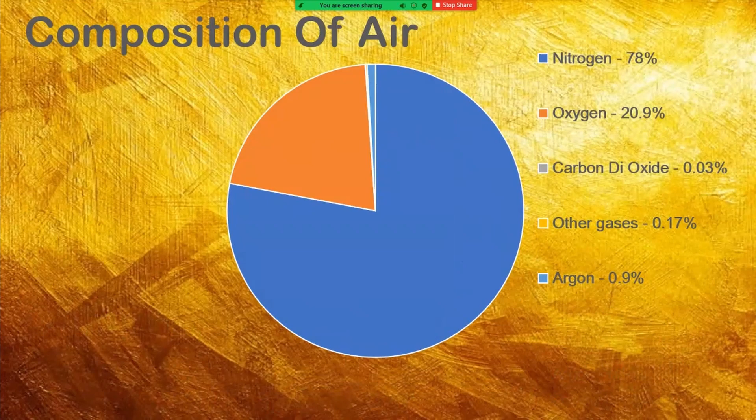So why are we bothering about it? To understand it, let's move on to our next slide.

Now, here we are going to see the fossil carbon dioxide emissions. If we observe the data in the year 2000, we can clearly see the carbon dioxide emission was below 25 billion tons. Moving further to 2002, we can see the graph rising. Between the years 2008 to 2017, we can see clearly an increment of 1.5% per year. And further in 2018, we could see the jump from 1.8 to 3.7, and further to 2.7%.

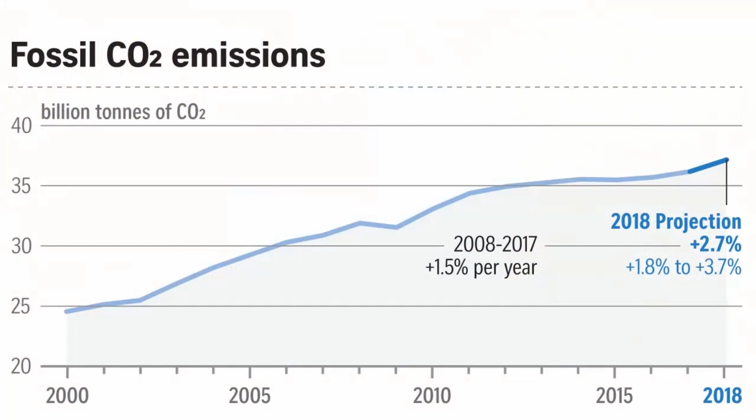Now, in the next slide, we are going to see the state-wise carbon dioxide emissions in India. Here we can see that Gujarat is holding the first position with a total of 90 million tons emission of carbon dioxide, having a total share of 18% in overall emission. And if we consider the state with least carbon dioxide emission, it is Uttarakhand, with 10 million tons, holding a share of 2% in overall emission.

This is the reason why we are so much concerned about the 0.03% of carbon dioxide in air, which is nothing except a slow poison to us. So to reduce this factor, we are about to learn a simple thing which can change the entire scenario, and that thing is electric vehicle.

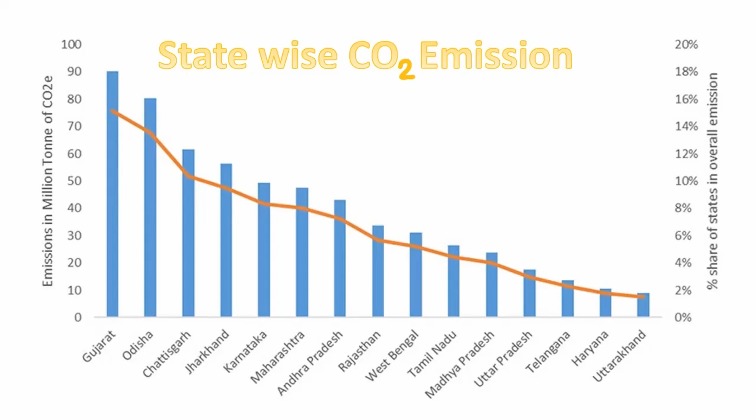So what is an electric vehicle? As Bodhisattva said, electric vehicles can reduce the use of carbon dioxide, so we need to know about electric vehicle. An electric vehicle is one that operates on an electric motor. Here the electric energy is converted into mechanical energy. It is easy to charge and fast to go. It takes energy from renewable sources and is highly efficient with less fuel consumption.

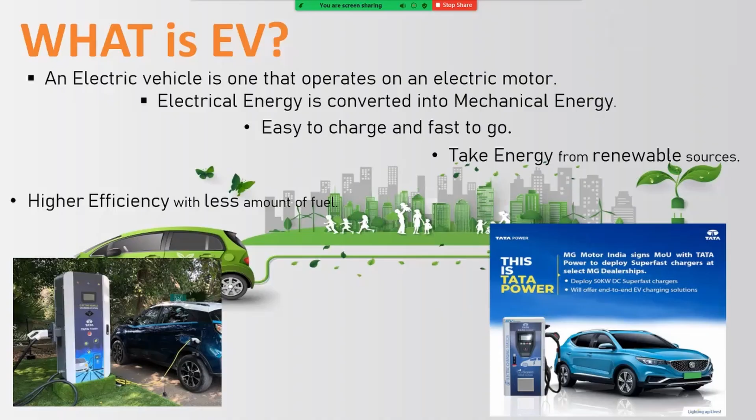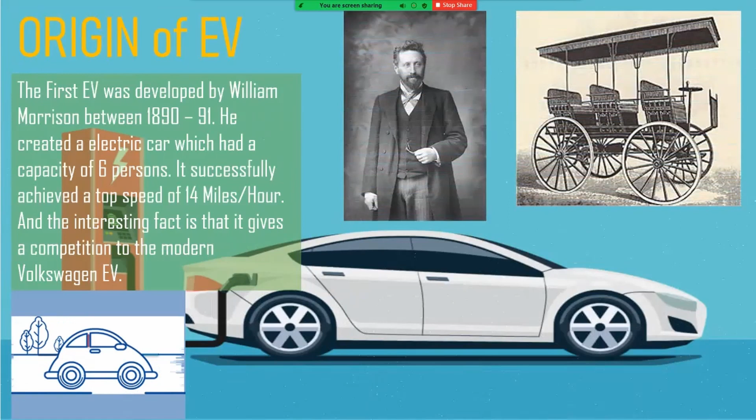Now we are moving to the origin of EV. The first EV was developed by William Morrison between 1890 and 1891. Here you can see a picture of William Morrison. He created an electric car which had a capacity of 6 persons. It successfully achieved a top speed of 14 miles per hour. And the interesting fact is that it gives a decent competition to the modern Volkswagen EV.

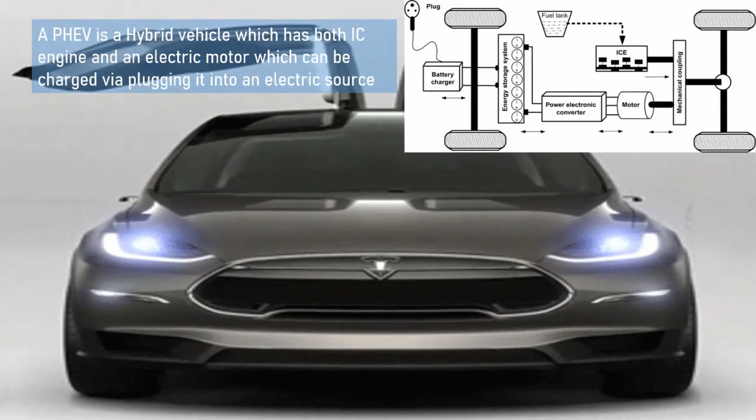So, what is PHEV? A PHEV is a hybrid vehicle which has both an IC engine and an electric motor, which can be charged by plugging it into an electric source. Here we can see the two-way power output in the picture, an IC engine as well as a motor. The IC engine gets power from the fuel tank, whereas the motor gets power from the battery. The battery is further charged from an external source.

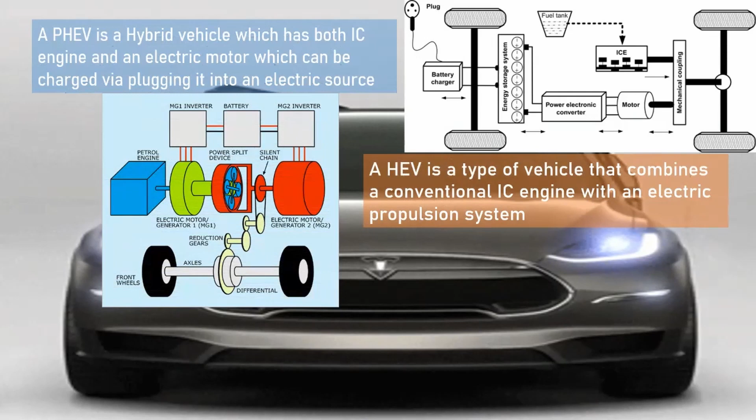Now, BEV, battery electric vehicle. A battery electric vehicle is a pure electric vehicle that exclusively uses chemical energy stored in the rechargeable battery packs, with no secondary source of propulsion. So in short, a BEV is an electric vehicle that gets power only from one source, and that is the lithium-ion battery.

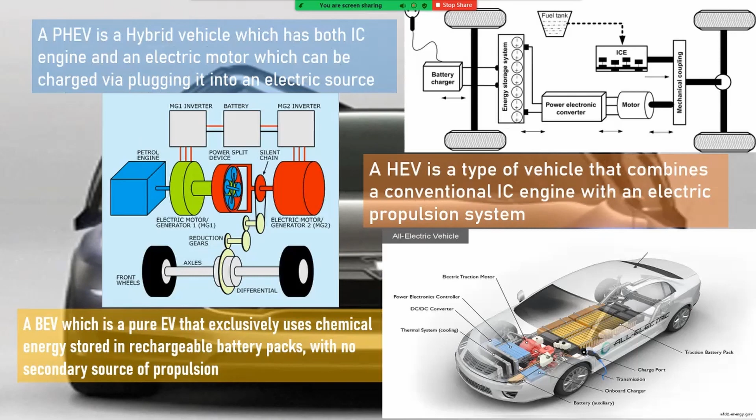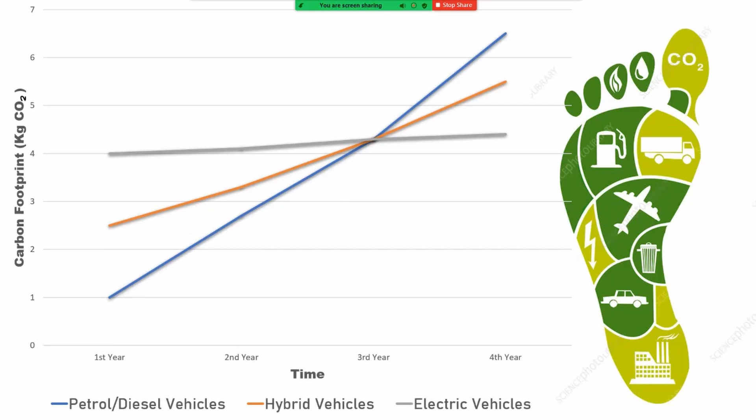So now it totally depends on you. What will you choose? A vehicle which will pollute the environment over time, or a vehicle which will not affect the environment and help reduce carbon dioxide in nature?

Now let's move on to our next slide.

We all use some kind of transportation to reach our desired destination, be it a bicycle, a bus, a car, or an airplane. We know that a cycle is eco-friendly, as it does not consume any fuel other than human resource.

But we must all know that the process of manufacturing it includes a lot of carbon footprint. In fact, anything we use in our daily life is somehow connected to this carbon footprint, which we've discussed in the previous slide as well as in this slide.

So what is this carbon footprint? The amount of carbon dioxide that is released into the atmosphere as a result of the activities of a particular individual, organization, or community is known as carbon footprint.

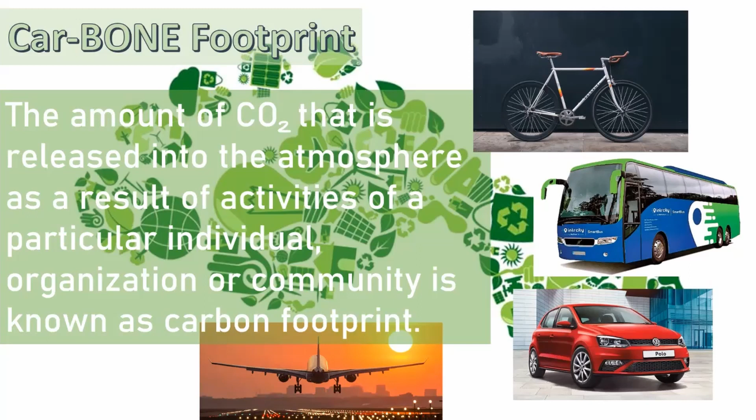Okay, now we're moving to the basic components of an electric vehicle. Firstly, the traction battery pack. As you know, the main function of a battery is to store electric energy in the form of DC current.

Now the power inverter. The main function of the inverter is to convert DC current into AC.

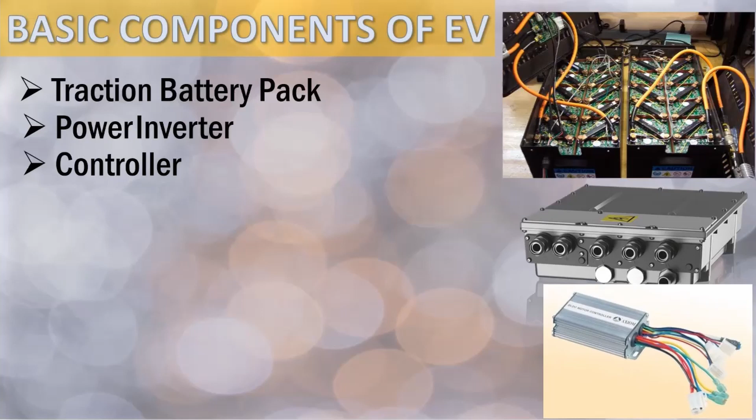The controller. The main function of the controller is to distribute the electrical energy from the batteries to the electric motor. And it is a huge part of the electric vehicle, the electric motor, because it generates the power used to start the electric vehicle.

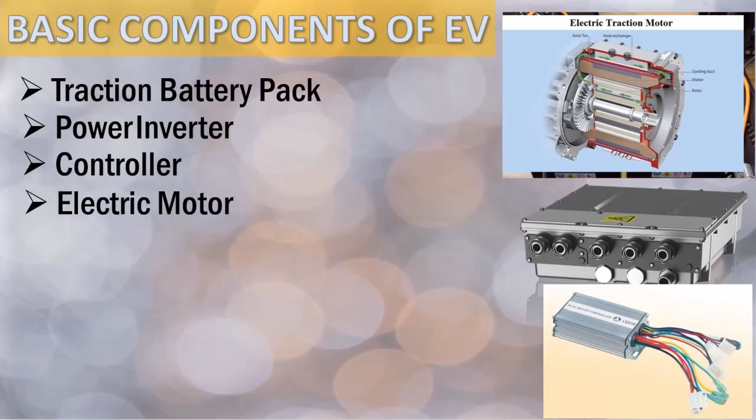It is the charging system. It is a very important system because through it we are getting charge in the battery of the electric vehicle.

And the transmission system. For this system, we are getting proper transmission of power in the electric vehicle, so we can get maximum speed in the electric vehicle.

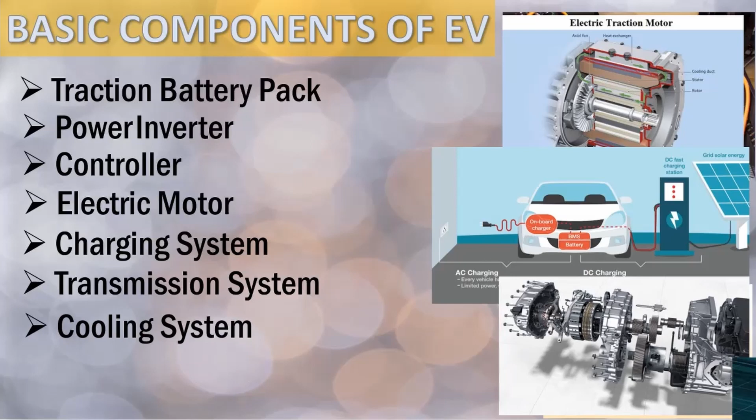And lastly, the cooling system. This system maintains a proper operating temperature in the electronic components and in the whole electric vehicle.

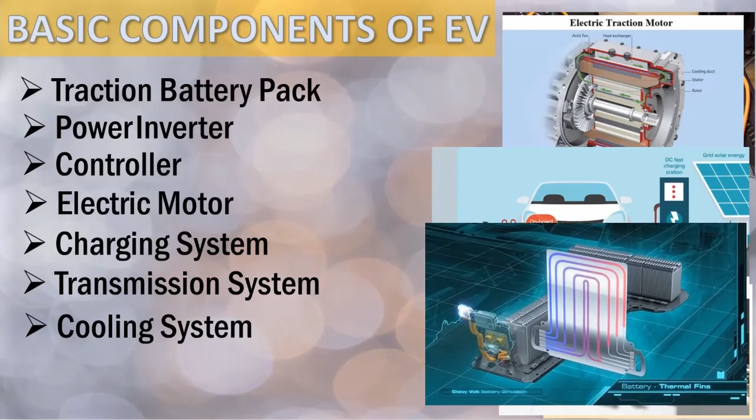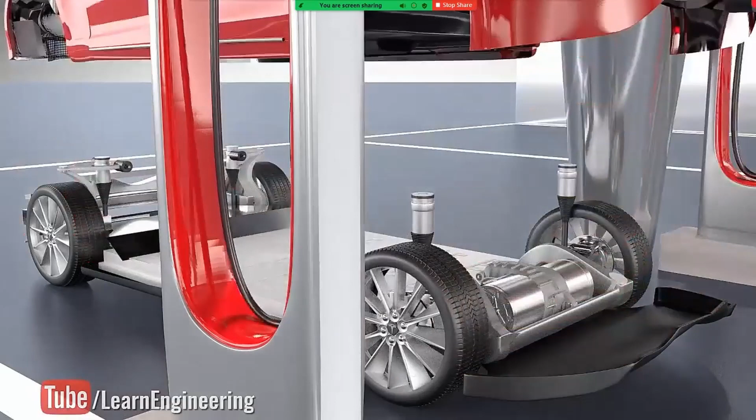Now we are moving to the mechanism of the electric vehicle. We will see how electric cars have achieved superior performance by analyzing the technology behind the induction motor. Before that, we'll see what is an inverter. Yes, you can see here it is the inverter, which we already discussed, and it is the lithium-ion battery pack.

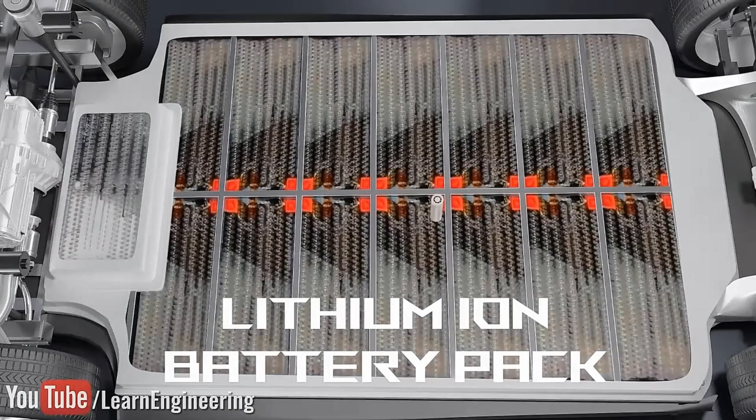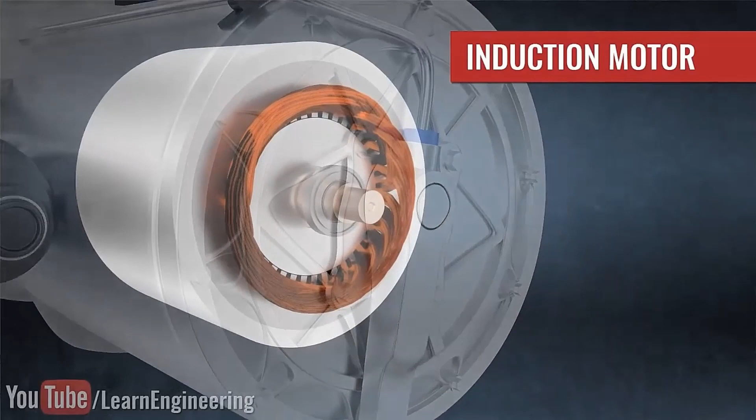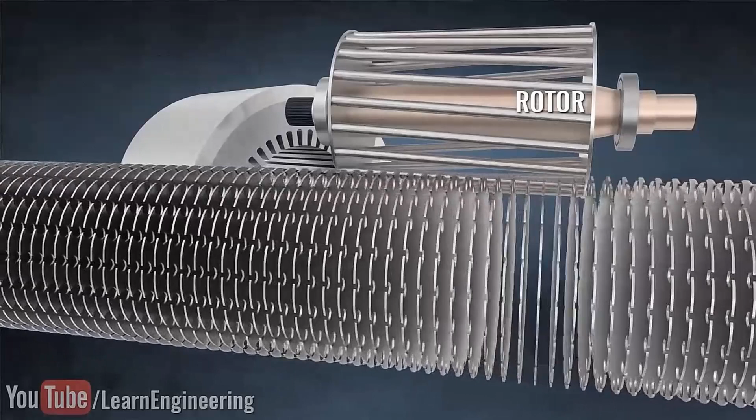Now we are moving to the construction details of the induction motor. The induction motor mainly has two parts: one is the stator, and the other is the rotor. Here you can see the construction details of the rotor.

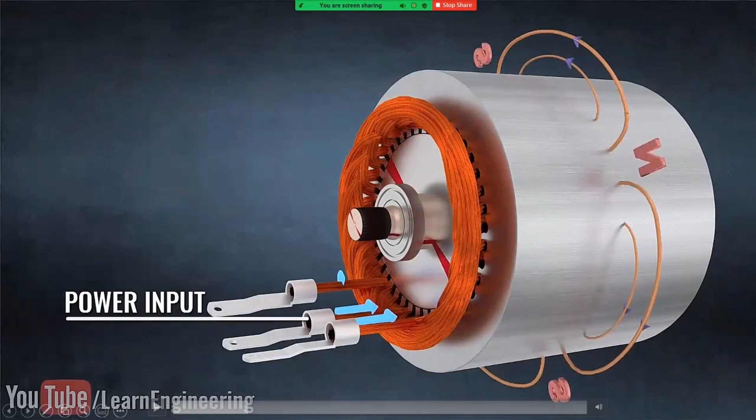Now, what is the mechanism? A three-phase power input is given to the induction motor, and it generates a magnetic field, a four-pole magnetic field. This rotating magnetic field induces current which flows through these wires.

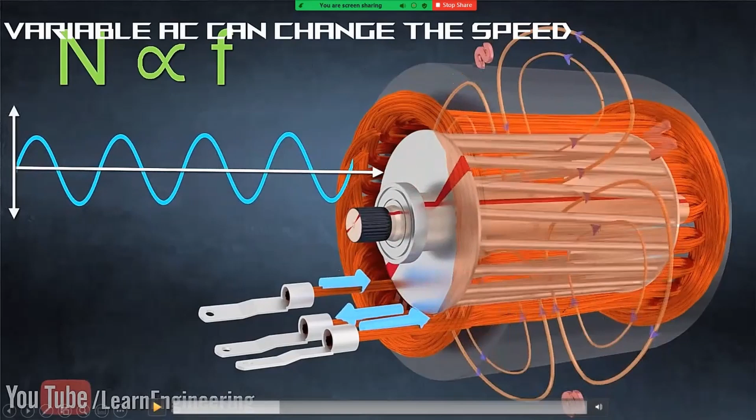The beauty of the induction motor is that its speed depends on the frequency of the AC current. As you can see, N is directly proportional to F. So just by varying the frequency, we are able to alter the drive wheel speed, giving us a huge range for varying the speed. The motor speed can be in the range of 0 to 18,000 RPM.

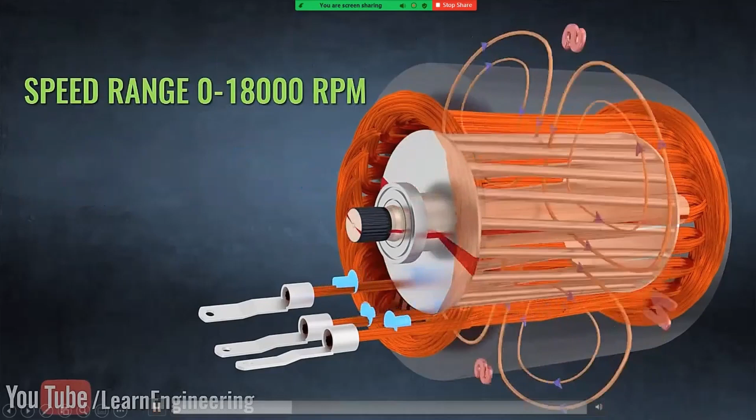This sizable range gives a decent advantage compared to an IC engine. In an internal combustion engine, it produces usable torque and power output only within a limited range, as you can see here.

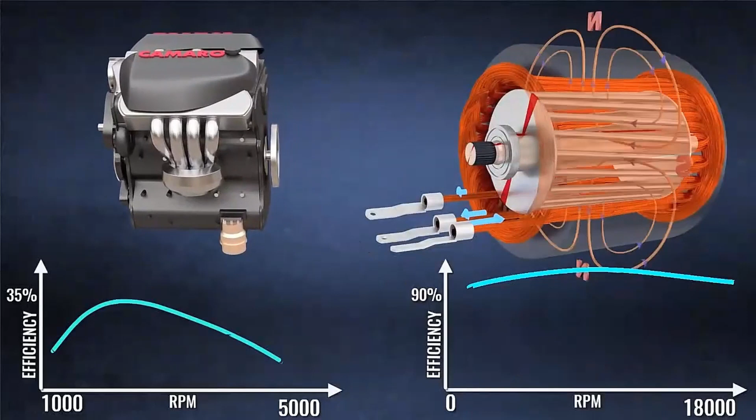Moreover, in the IC engine, we are getting linear motion, so it is more complicated, and we get less efficiency in the IC engine compared to the induction motor. For the induction motor, the efficiency is 90%, but in the IC engine, it is only 35%.

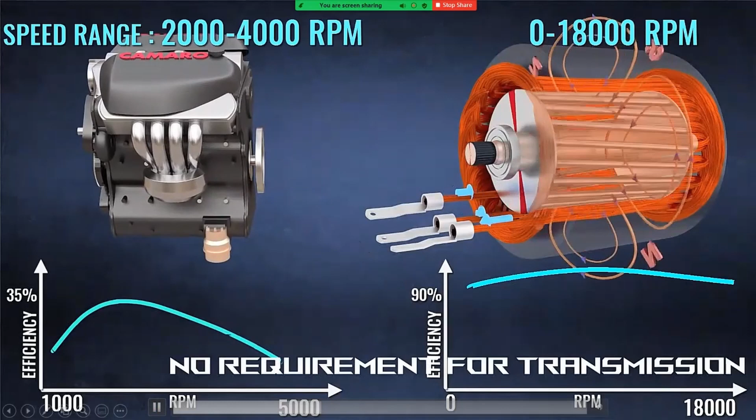As discussed, in an IC engine it produces only linear motion, and because of this we face many mechanical problems.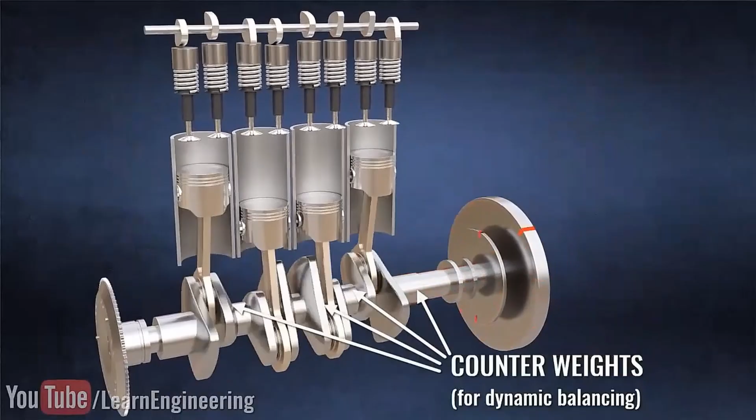But in case of an induction motor, we get directly rotational motion and uniform power output. As a result, a typical IC engine has a weight to power ratio of only 0.8 kilowatt per kg, whereas for the induction motor we get 8.5 kilowatt per kg.

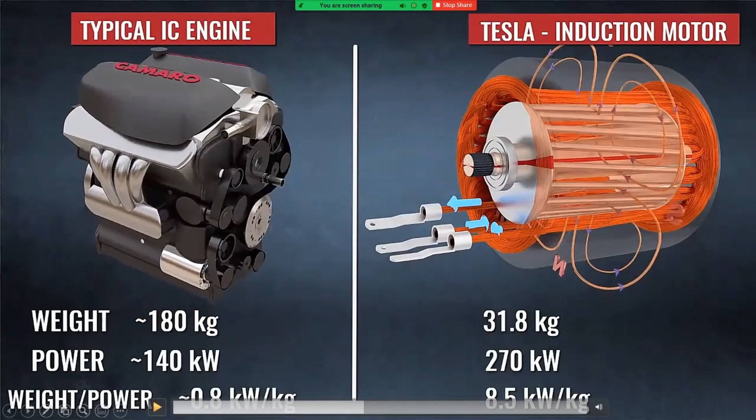Now, from where does the motor get power? It's from the battery pack. The battery supplies DC power, so just before supplying to the motor, it should be converted into AC power.

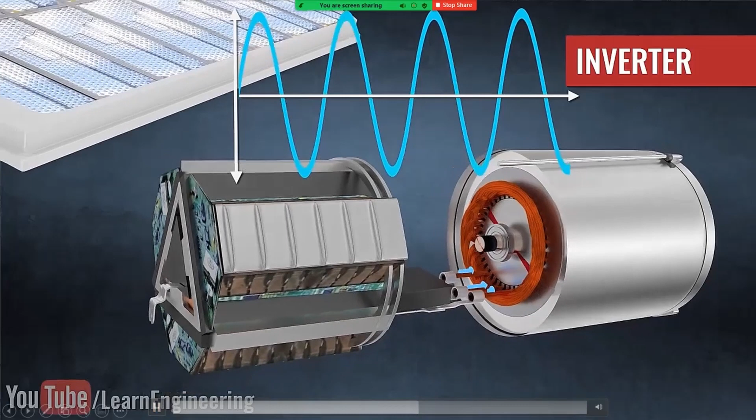An inverter is used for this purpose. It also controls the AC power frequency, so it plays a huge role in controlling the motor speed. Moreover, it can control the amplitude of the AC power. You can see here how the amplitude is varying in the AC current, shown in the graph. Thus, we can say that the inverter is the brain of the electric car, as it controls the motor speed.

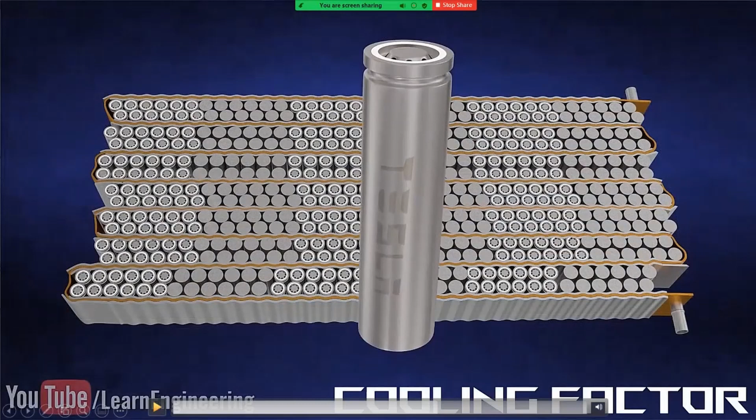Now let us focus on the battery pack. Here we are using lithium ion batteries. The batteries are arranged in series to each other so that we can get proper heat dissipation.

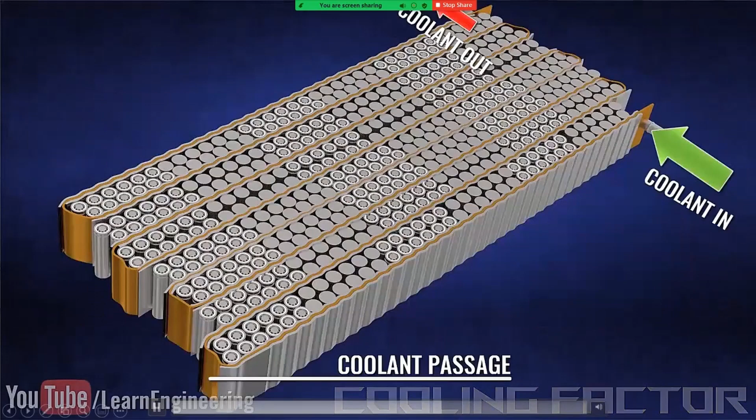You may wonder why we use many small batteries instead of one. Actually, using many small batteries instead of one ensures proper heat dissipation and minimizes thermal hotspots. Here you can see how the cooling factor works.

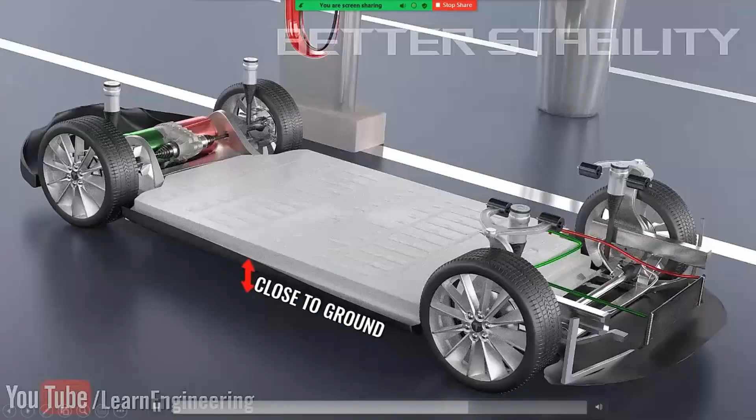The amusing fact is that we are using 7,000 battery cells here. Moreover, the battery pack is placed close to the ground, giving better stability and structural support.

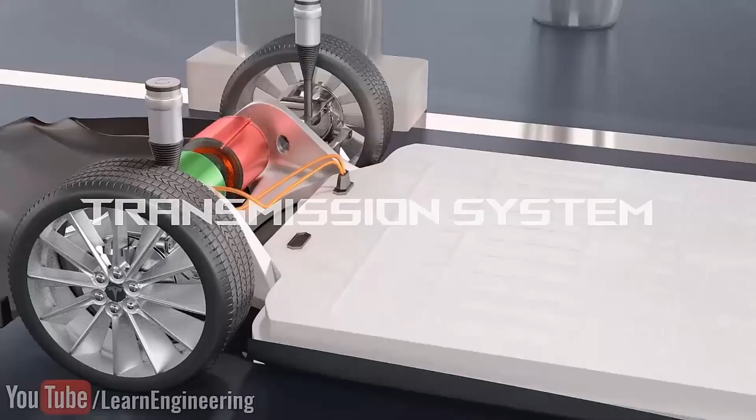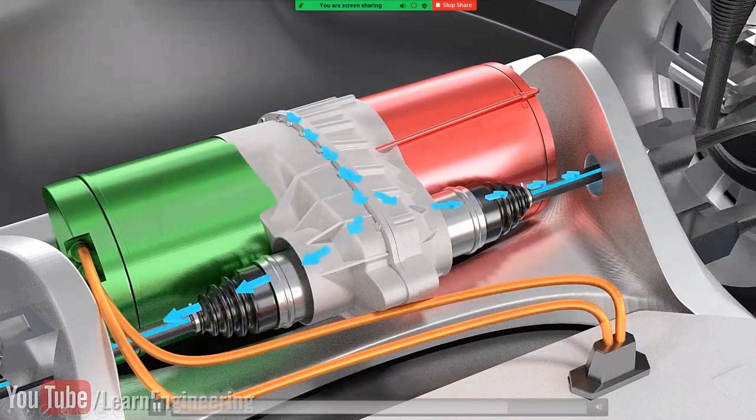Now we are moving to the transmission system. As discussed, the transmission system provides proper transmission of power output to the wheels so that we can get maximum power in the electric vehicle. Here you can see how the transmission works.

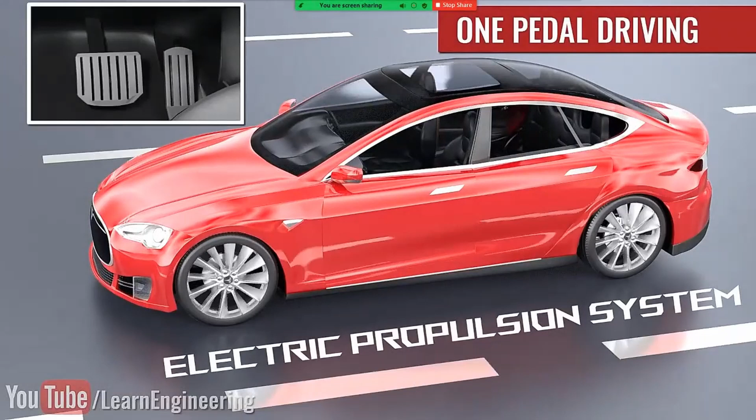Now, the electric propulsion system. Here we use one pedal driving and the regenerative braking system to reduce the loss of kinetic energy. In this system, the kinetic energy of the car is converted into electricity, and let's see how.

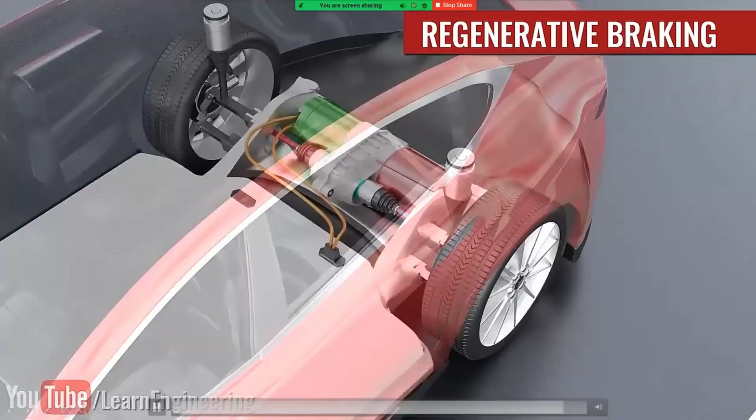Here you can see the rotational motion we get from the wheel is directly converted to electricity via a generator, and this electricity is used for further recharging the battery.

Last but not the least is a huge safety feature: the crumple zone. You may wonder what a crumple zone is. Typically, crumple zones are located in the front part of the vehicle, used to absorb the impact of a head-on collision, providing a huge safety feature.

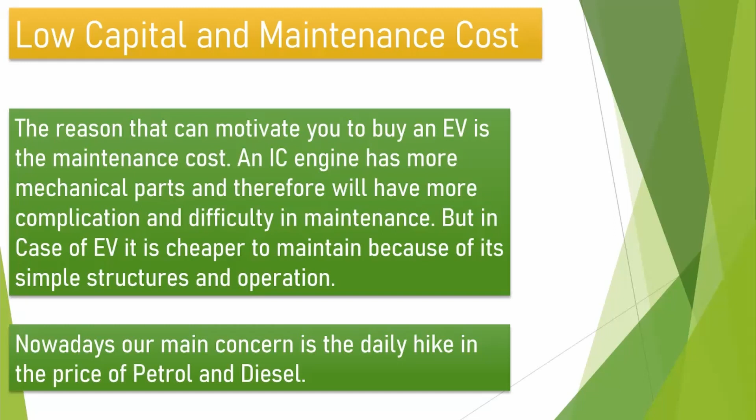Nowadays, our main concern is the daily hike in the price of petrol and diesel. Let's see a quick comparison between the running cost of an IC engine and the electric vehicle. For an IC engine, we pay a charge of 4 rupees per kilometer, but for an electric vehicle, we pay just 0.40 rupees per kilometer. So it is 10 times cheaper than an IC engine.

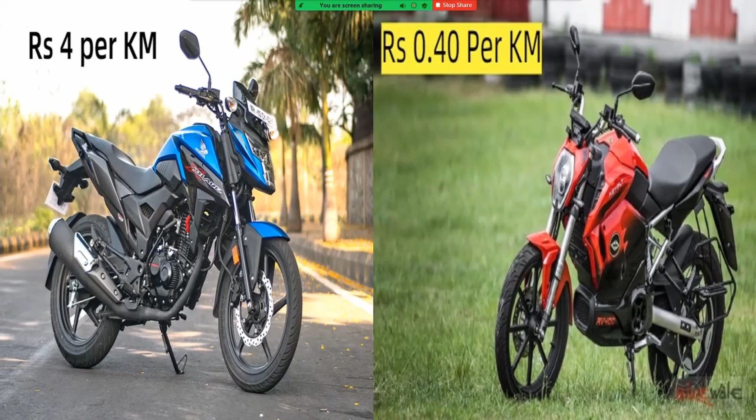Now it's your turn to choose the vehicle. Do you choose a so-called cheap IC engine, or an environmentally friendly electric vehicle, which can be your dream bike also? So before making any decision, think about it.

Let's now move on to our next slide, that is well-to-wheel efficiency. So what is well-to-wheel efficiency? The amount of usable energy which is obtained from the source energy, neglecting all the losses, is known as well-to-wheel efficiency. The higher the well-to-wheel efficiency, the higher is the efficiency of the vehicle.

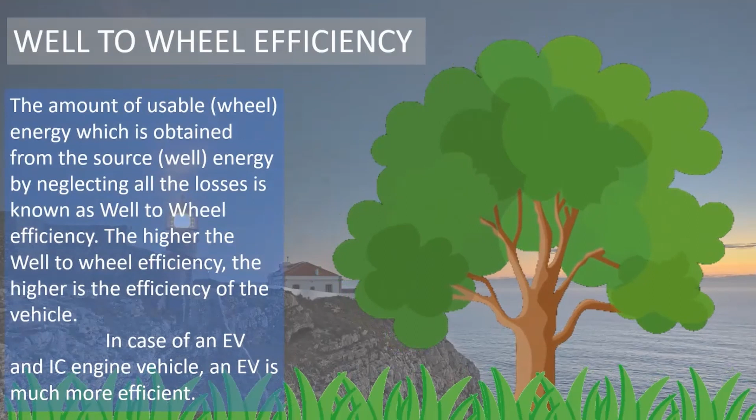In case of an EV and IC engine, an EV is considered to be much more efficient. To understand it, let's see a simple calculation. At first, let's focus on the IC engine vehicle.

We can see here the extracted amount of energy is 100 units. It must be refined and needs transportation to the nearest fuel bunk, so there must be some losses, let it be 12 units. After the petrol, diesel, or any fuel is received at the petrol bunk, the delivered useful energy is 88 units.

Now we need to further transport it to the vehicle. After transportation, there is engine and transmission loss that is huge, let it be 75 units. So at a total loss of 87 units, we are getting only useful energy of 13 units. So an internal combustion vehicle is 13% well-to-wheel efficient.

But in case of an electric vehicle, we can see that if we get 18 units of renewable energy, due to transmission and distribution we must get a loss of around 1 unit, which is very less. After it gets delivered to the power station or charging station, we get only 17 units.

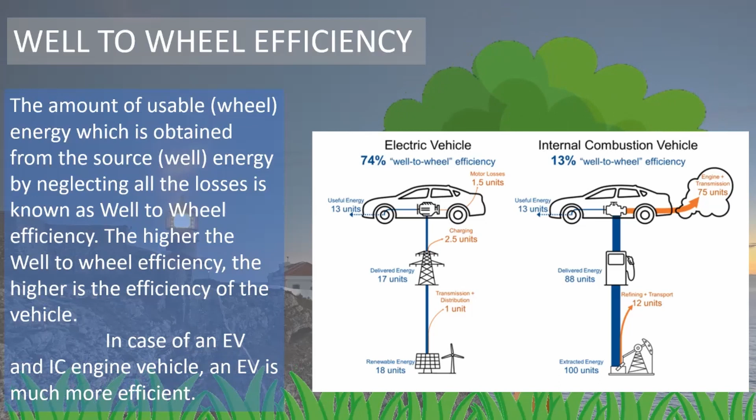Now we need to charge the EV. We all know charging has some losses, so let the loss be 2.5 units. And we also know it has an induction motor, as we already saw in the previous slide, so the motor will also have some resistive losses, let it be 1.5 units. So taking a total loss of 5 units, we are getting only 13 units of useful energy. So EV is 74% well-to-wheel efficient.

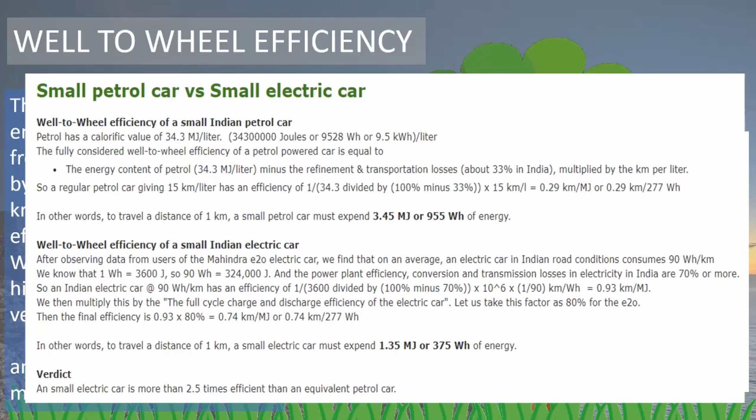Now let's see another simple calculation. I will not be explaining this one; if you want an explanation, you can pause the video and see the calculation. So here the verdict is a small electric car is more than 2.5 times as efficient as an equivalent petrol car.

Now, anything is not 100% efficient, so electric vehicles have some disadvantages also. They take a long time to charge and deliver a short range. The initial investment is high, as the on-road price of an electric vehicle is much higher than an IC engine.

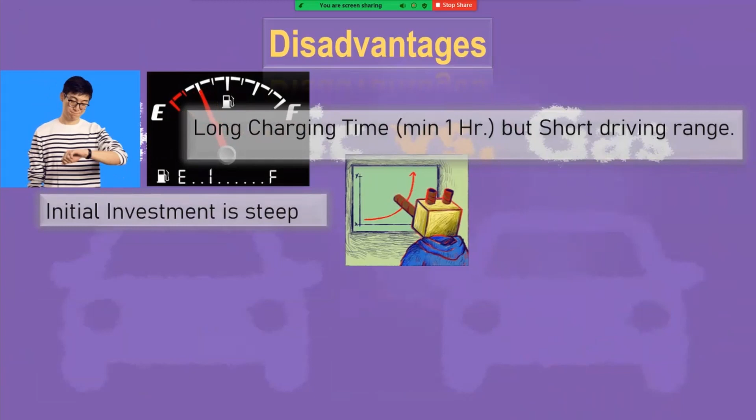Now, the unavailability of charging stations is all about the short driving range. There are very few charging stations available near you, so you can't drive tension-free to your destination.

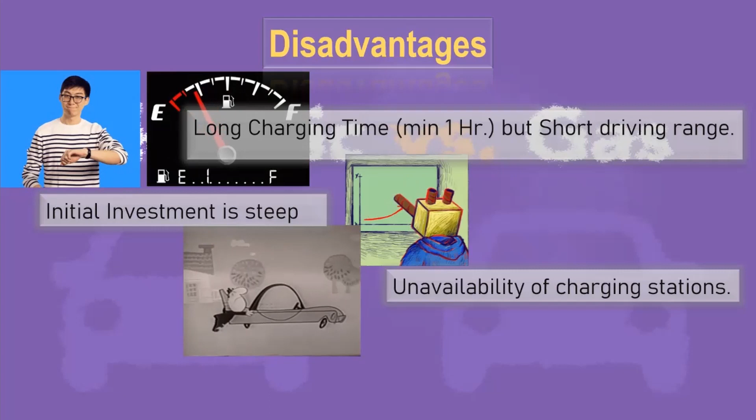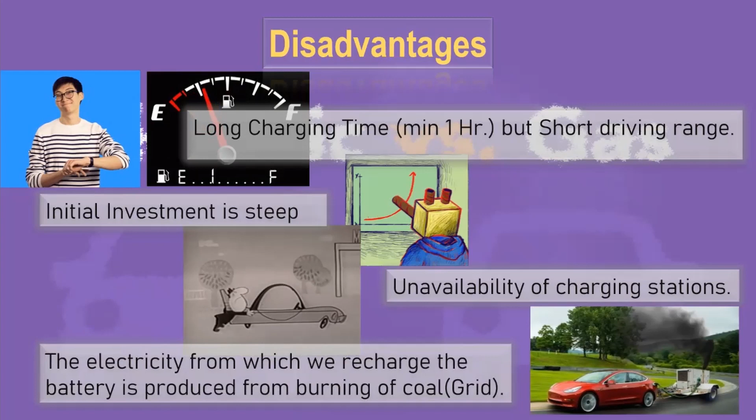The electricity from which we recharge the battery is produced from burning coal. Actually, in India, the electricity is made from coal, and the burning of coal is harmful for nature and for us also. So it is a very important disadvantage for the electric vehicle.

Now let's move on to our next slide, that is myths and facts. We all have some myths during buying anything, so before we go to buy an EV, we also have some myths.

Let's break it. Our first myth is EVs are slow as a tortoise. So what's the fact? For safety reasons, they are locked at a speed. In fact, we already saw that it has a variable AC, so it has that instant torque generation. So it is not slow, it is just locked because of a safety feature.

Now our next myth is that they can't function during harsh weather conditions like rain or waterlogging, or they can get easily damaged by coming in contact with water. So they are properly sealed so water can't reach the sophisticated parts. Before running in Indian conditions, they are examined carefully whether there is any defect or not. So they are not prone to any weather condition.

In fact, they have one advantage over a normal vehicle. A normal vehicle has an exhaust system; if it gets stuck, there will be no air passage, so eventually it will lose power.

In case of an EV, you have the advantage of no exhaust system, so it will produce the same power in any weather conditions.

Last, EV's batteries don't last long. Eventually they wear out soon.

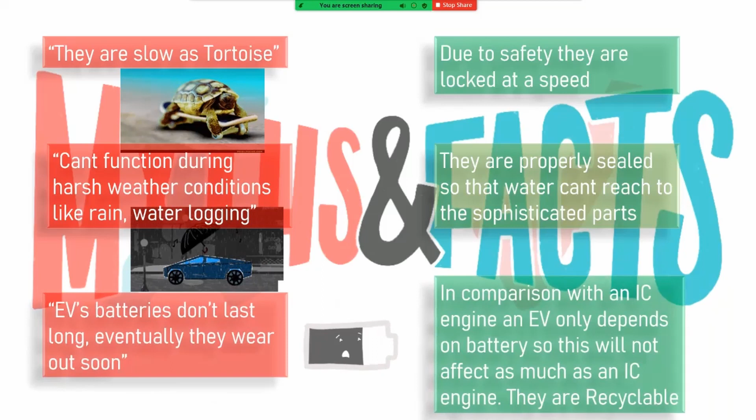If you consider an IC engine, it requires not only petrol, but battery, Mobil, coolant, air filter, and many more parts. If we sum this up, then they are not pocket friendly. But in case of EV, it only depends on battery, so this will not affect as much as an IC engine vehicle. In fact, we all know that nowadays all the batteries are recyclable.

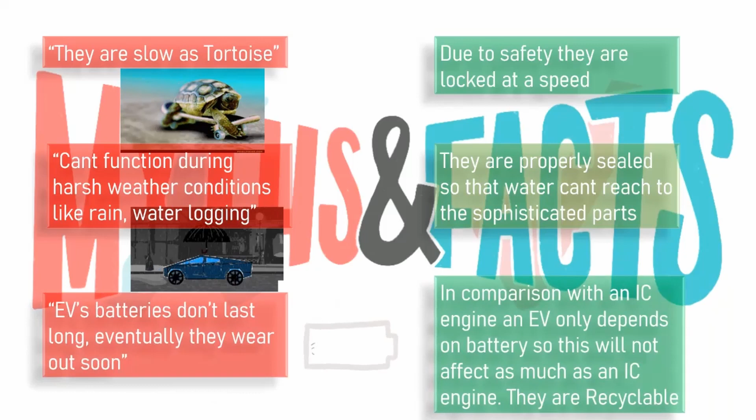Now let's see some of the initiatives taken by our government to promote EV. Our central government has planned to implement a budget of 10,000 crores to support EV according to FAME 2.

FAME 2 is further modified for electric two-wheelers, and now government has planned to give subsidy of rupees 15,000 per kilowatt hour from earlier uniform subsidy of rupees 10,000 per kilowatt hour.

The government also planned to support creation of charging infrastructure. Government has announced to give 15.62 lakh rupees to support EVs through subsidy.

Government has also introduced the scrap policy. If you don't know scrap policy, according to it, if you have any old vehicle, by scrapping it you can get a huge discount on the upcoming non-polluting vehicle. So our government is also working hard to implement EV in India.

Not only the central government, but also the state government has taken some initiative to support EV. For a pollution-free transport system, the West Bengal government has already introduced 80 electric buses in Kolkata.

The West Bengal government is planning to come up with charging stations in collaboration with CESC to encourage the use of more electric vehicles.

WBREDA, commonly known as West Bengal Renewable Energy Development Agency, is an organization under the development of non-conventional and renewable energy sources, which also supports EV to use renewable resources and improve nature.

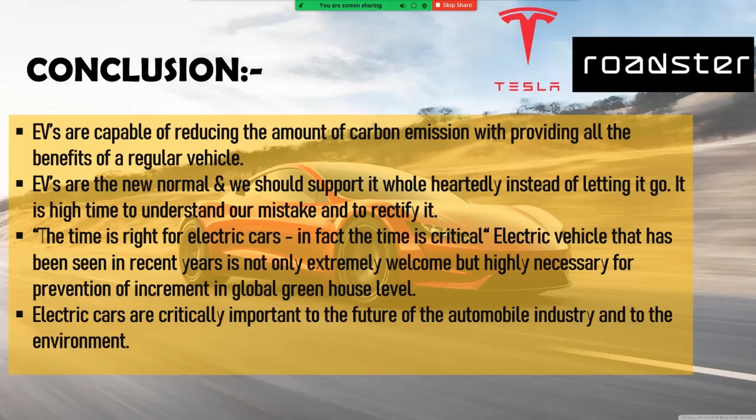Electric vehicle adoption seen in recent years is not only extremely welcome, but highly necessary for the prevention of increment in global greenhouse level. Electric cars are critically important to the future of the automobile industry as well as the environment.

Now let's see our references.